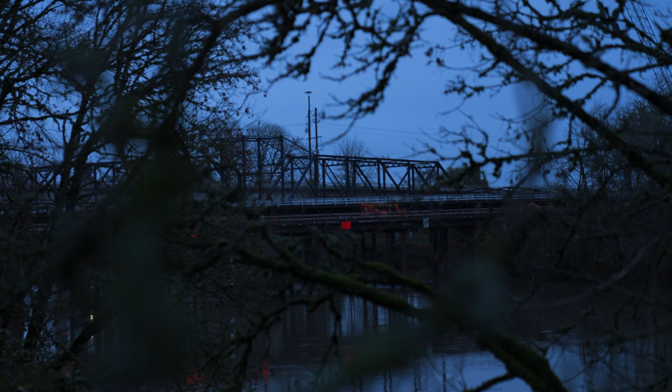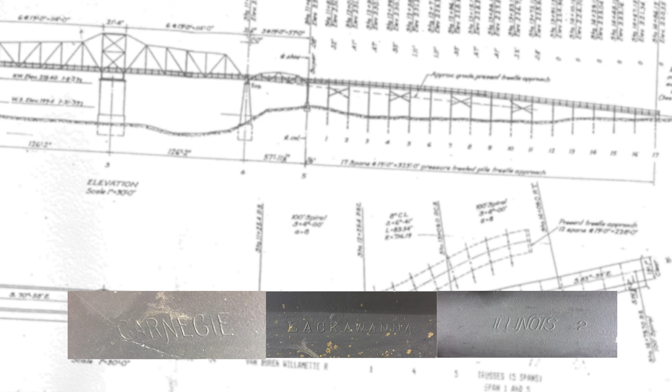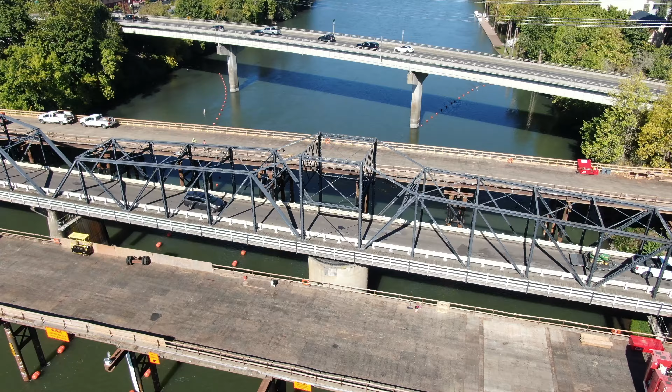Trusses were used in bridges in the past because it was the technology available at the time. They could go to a steel fabricator and get those pieces made, and then transport them to the site and build them. It was a real practical way to get a longer span, having individual pieces short enough to transport, and with the equipment of the time, you could actually build the bridge. Trusses are a very lightweight structure.

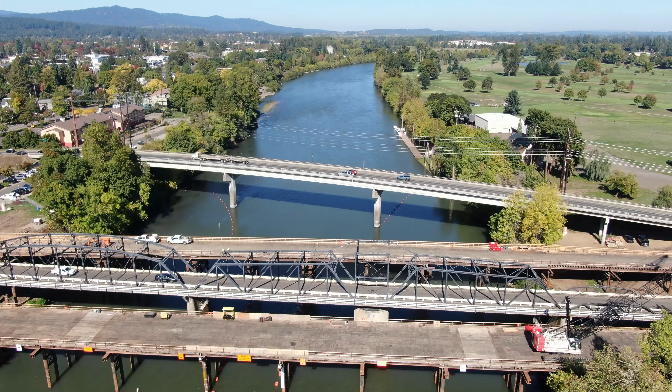That made them favorable for shipping. A lot of them were built in the steel mills, near the steel mills in Pennsylvania. This particular one, I believe, was built in Portland, but the steel probably wasn't made in Portland, and they still had shipping costs to get it down here.

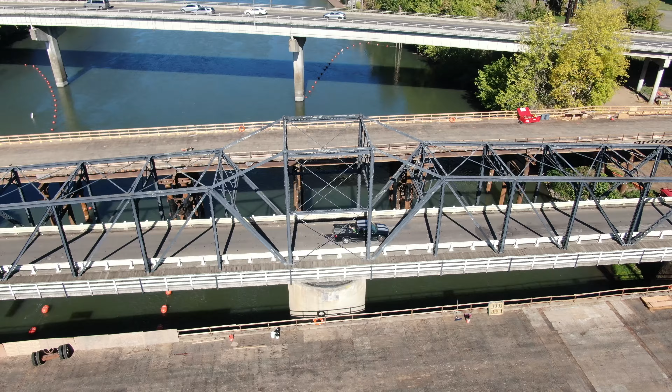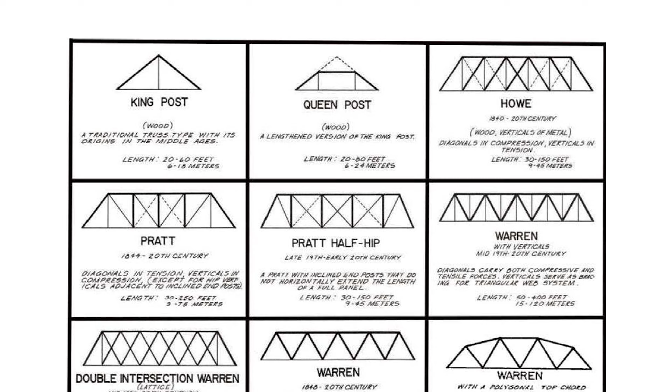The members are all lightweight and they can be assembled with light construction. If you think about it, any person can put a truss together by just putting triangles together, and then the next triangle, and the next triangle, and just build yourself out. That's oversimplistic, because one end of that triangle system has to be supported at all times.

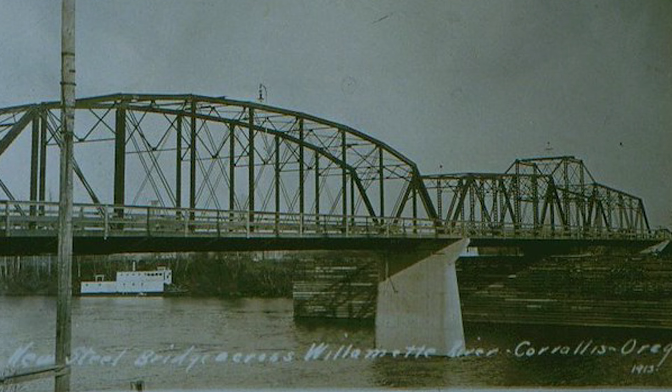So these bridges that we did in Minneapolis, as we talked to the old folks, this was in '68, there were still some who remembered it being built in the 19th century. They said those trusses were built off the ice, so they actually just shored them up off the ice as they built the truss across the river. Normally now you might build a small trestle to support the construction of the truss. But trusses are easy to build.

We've actually taken them apart and reassembled them, and you can see why they did it once you've done that. Lightweight, easy to put together, doesn't take complicated ironwork, and the pin-connected truss was very easy to handle.

Typical truss analysis methods have changed over the years. When the Van Buren Bridge was built, it was all done by hand. When we analyze the Van Buren Bridge, we use computer software. We'll do a 2D analysis of the truss, model some elements for the truck to drive on, put those loads into the truss, but primarily now it's going to be a computer model.

The Van Buren Bridge was built in 1913, so it would have been people just grinding through calculations of allowable stress in each piece of steel and choosing the most restrictive load combination that piece is going to see. It would have been extensive, painstaking calculations, and those calculations would have been checked and rechecked.

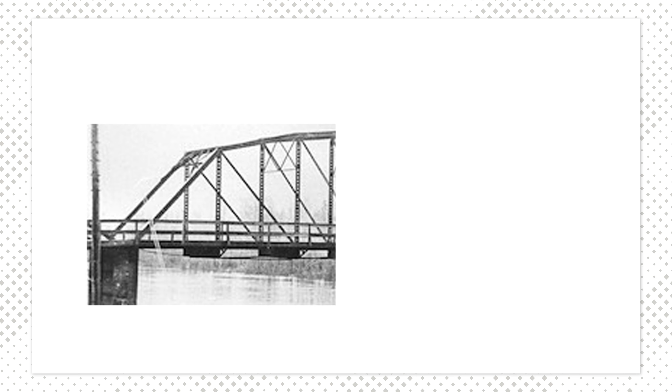I prefer analyzing using what we'd call the method of joints, which is taking it joint by joint, starting out with the bridge reaction and working it ahead joint by joint, moving those loads down to the next joint. It's a very easy, intuitive way to look at a truss. You have to be careful that you've applied your loads correctly, or that you're keeping track of putting loads on as you move to the next joint.

And it's labor intensive. The method of joints is a thorough method that provides the internal force, either tension or compression, of every member in the truss.

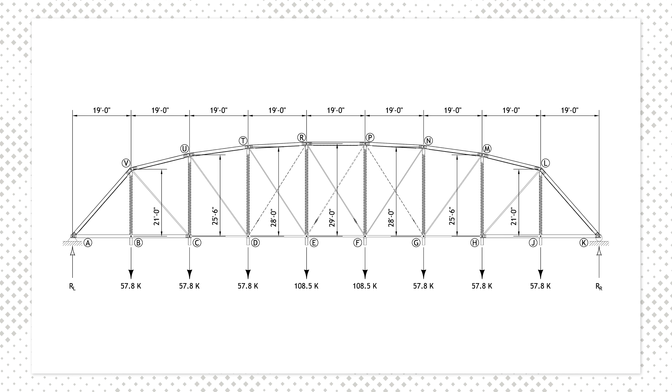We begin by labeling each joint and give the member the name of the two adjacent joints. This method isolates each node or joint and applies two equations of equilibrium: sum of forces vertically and horizontally. Because pins don't transmit moment and a point has no moment arm, we cannot sum moments.

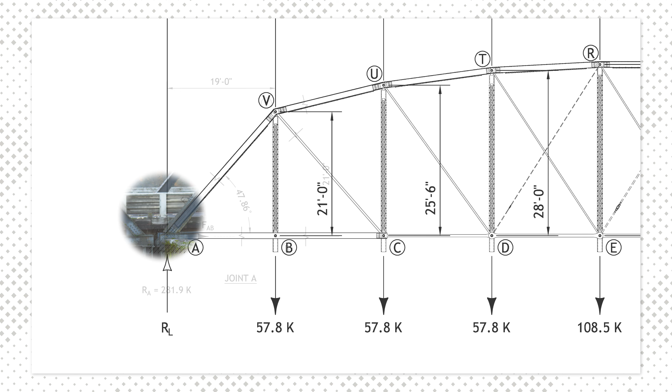We can now begin our analysis by choosing the first joint to analyze. This requires finding a joint with only 2 unknown forces. Often the support joint meets this criteria. Let's start with joint A. This point has 1 known force, which is the upward reaction, and 2 unknown forces from members AB and AV.

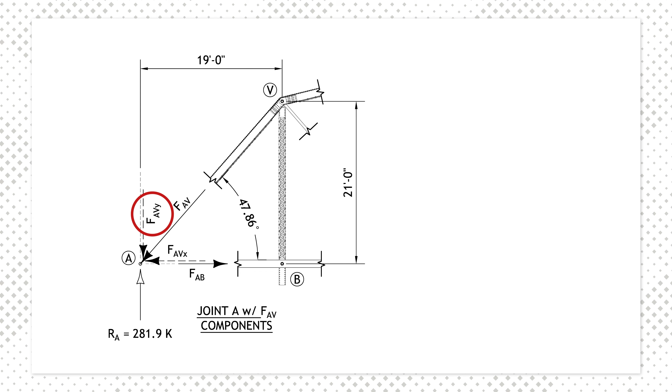Because the only 2 forces acting in the y direction are the reaction force and the vertical component of force AV, let's sum forces in the vertical direction to find force AV. We can now sum forces in the x direction to find the force in member AB. We can repeat this process, moving from node to node along the truss, to find all the internal forces.

Method of sections is less labor intensive. You cut a section through the truss, and generally I use the method of sections when I'm trying to repair a member or understand a member and not have to move through the method of joints. I can cut the section and work just in that section.

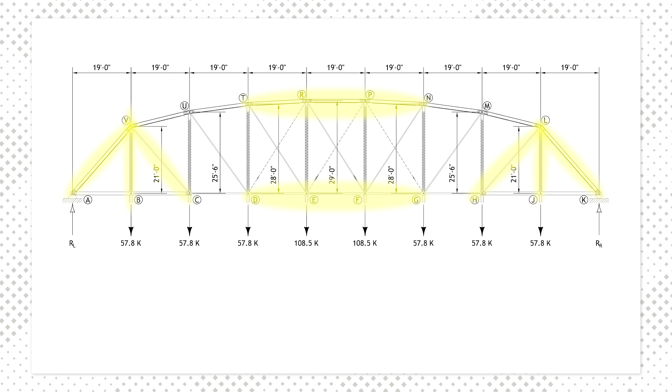The method of sections allows us to focus on portions of the truss that are of most interest, often the middle chords where moment is a maximum, and end webs and posts where shear is highest. To do this, let's create a free body diagram of the truss that passes through the middle. We cut only 3 members as we have 3 unique equations of equilibrium and can use the left or right side of the diagram. At each member we cut, we replace it with an axial force along the member length.

We guess the direction of the force, remembering if we draw it in the wrong direction, we will simply get a negative number for the force. We will use sum of moments about 2 points, as well as the sum of forces vertically and horizontally, to solve for the internal forces of the cut members. We choose the points of rotation where 2 internal member forces intersect. Note one of these points of rotation often is off the free body diagram. Not only is this okay, it simplifies the solution.

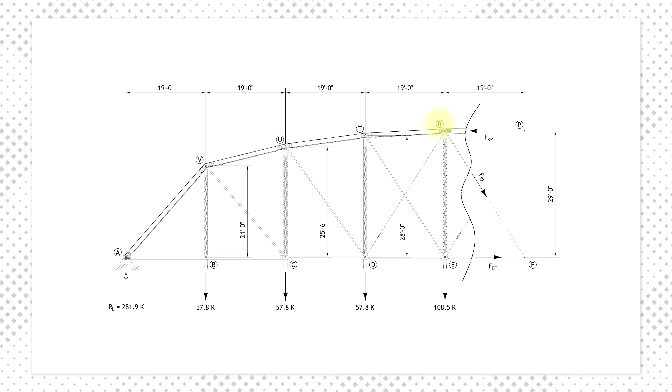Let's begin by summing moments about point F. We get the following expression and find F sub RP equal to 511.6 kips. Summing moments about point R, we get and find F sub EF also equal to 511.6 kips.

We can now sum forces vertically and horizontally to get F sub RF and use whichever direction we didn't use to check our work. Summing forces vertically, we see F sub RF is 0. Zero force members exist theoretically, but in practicality don't, due to unbalanced loading and secondary forces.

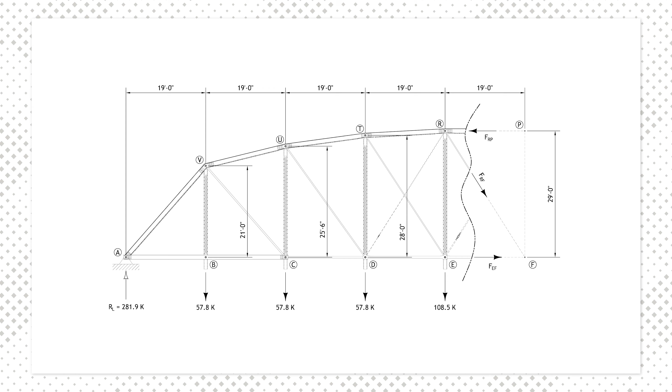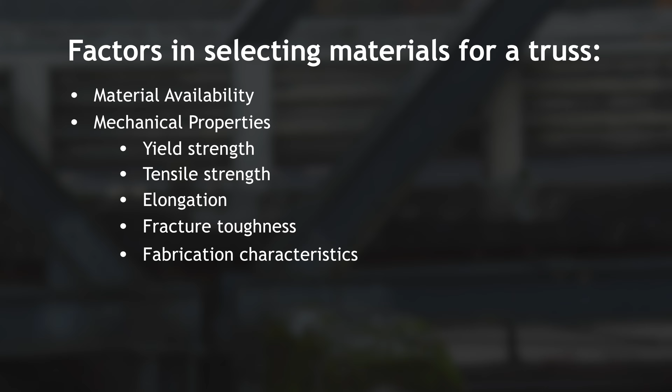Next, let's look at checking member strengths, utilizing the AASHTO LRFD bridge design specifications. We can do this now that we know the internal tension and compression forces in the truss. We first select the material we want to use for the structure. This will be a function of what material is available, its mechanical properties such as yield strength, tensile strength, elongation, and fracture toughness, its fabrication characteristics, and its resistance to environmental effects such as corrosion.

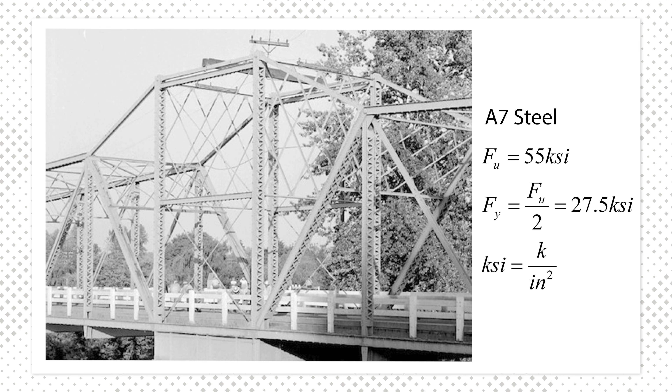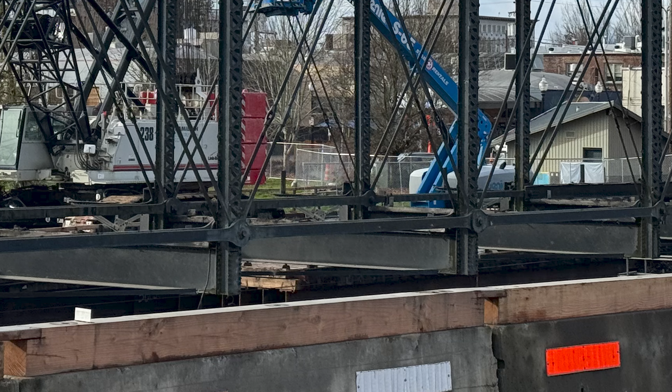At the time this bridge was built, A7 was the most common steel used for bridges. It has an ultimate strength of 55 kips per inch squared and specified yield strength of half that. Because to size a member in tension, you're going to look at the cross-section area, look at the load on it, and there's going to be a certain load per square inch of steel that steel can take, and steels come in different grades.

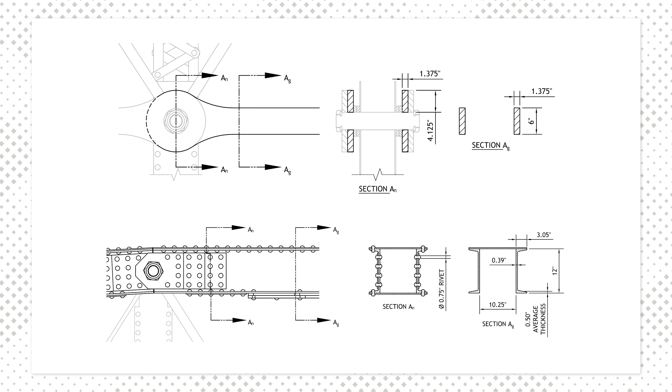Let's consider 2 failure modes for a tension member: yield on gross cross-sectional area and rupture on net area. For the eyebar, the gross section is away from the pin, and net section through the pin. For a built-up section, the gross section occurs away from any rivet holes, and the net section through the rivet line. Once we know the material and gross and net areas, we can apply concepts we learned in mechanics of materials to find the tensile strength of the member we are considering.

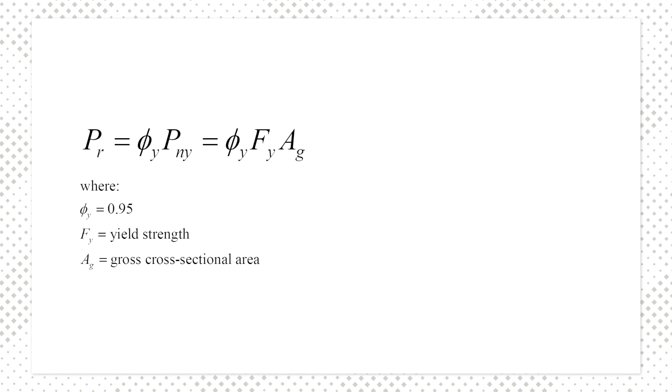The first equation finds the yield strength of the member by multiplying a resistance factor by the yield strength and gross cross-sectional area.

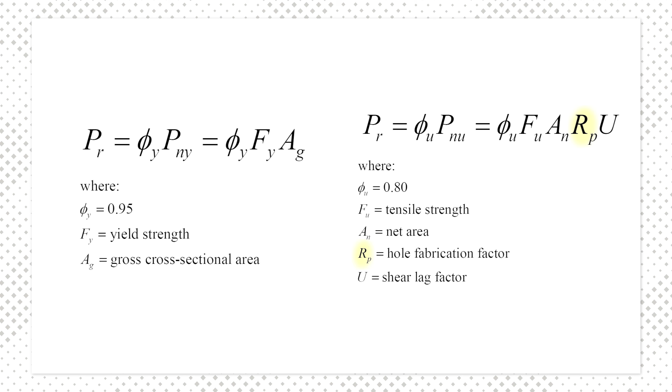The second equation finds the rupture strength by multiplying a resistance factor by the tensile strength, net area, hole fabrication method factor, and shear lag factor. We take the lower of the two values as the member strength.

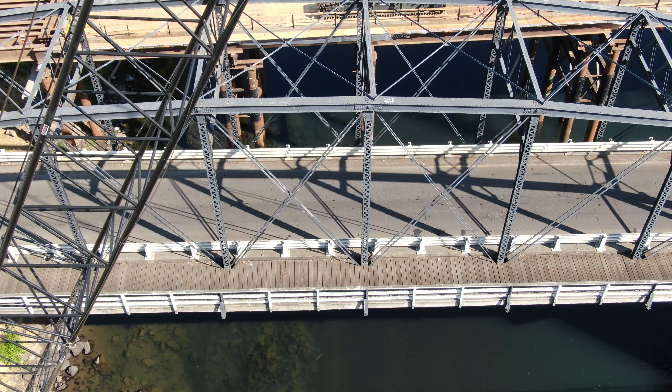If this strength is greater than the internal force, we can say the member is satisfactory. If not, we would retrofit the member in existing construction or choose a larger one for new. Note, this analysis doesn't consider fatigue, which we will cover in Module 7.

A member in compression is much more complicated than just a member in tension, because it can fail by being crunched together, or it can start bending, and columns can fail in different ways. There are some long-established formulas for how slender you can make a part that's in compression. You can go to a truss bridge and pretty easily look at the members in tension and compression, because your tension member will have a much smaller cross-section than those in compression.

Buckling most often governs compression behavior, as members tend to be proportioned such that they will bow outward before the material can yield. Buckling occurs when a compressive load is applied to the end of a member. Slight imperfections in load and alignment cause the middle of the column to start to displace perpendicular to the long direction of the member. As the displacement increases, secondary forces occur which cause more displacement, leading to higher secondary forces, eventually causing the member to buckle and potentially collapse.

The geometry of a structural member drives how it will behave under load. Bending members are most efficient when they are deep compared to their width. However, compression members are most effective when they are more square. This is because the member will buckle about the axis with the smallest radius of gyration. Also, remember that as material is moved away from its neutral axis, the section becomes stiffer, stronger, and less prone to buckling.

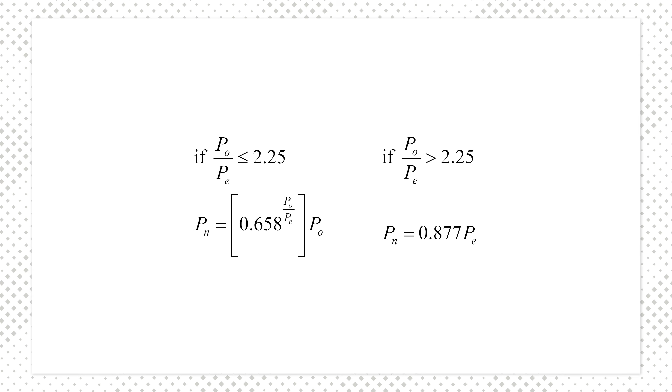We then multiply P sub N by the resistance factor, phi, and compare this against the internal compression force in the member. If this value is greater, the member has sufficient design strength.

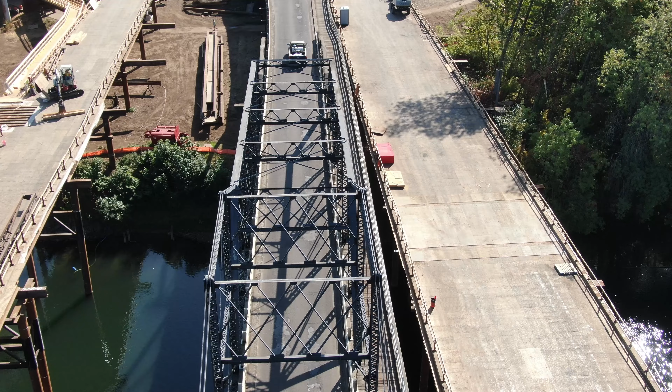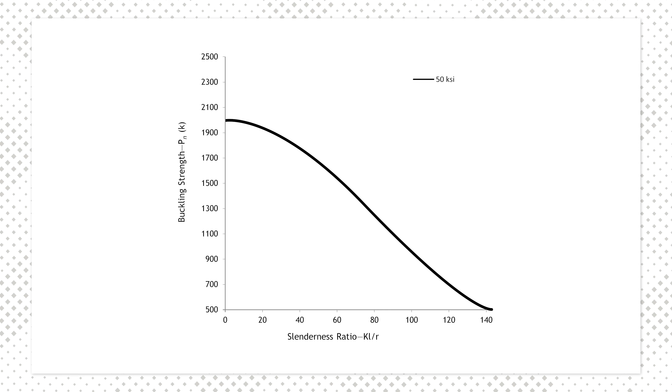Looking at these equations in figure form may help us to better understand what is going on. If we plot buckling strength on the vertical axis and slenderness ratio on the horizontal, we see how strength drops as slenderness increases. In other words, if a member gets longer or smaller in cross-section, buckling strength decreases. We also see the Euler equation over-predicts strength for smaller slenderness values.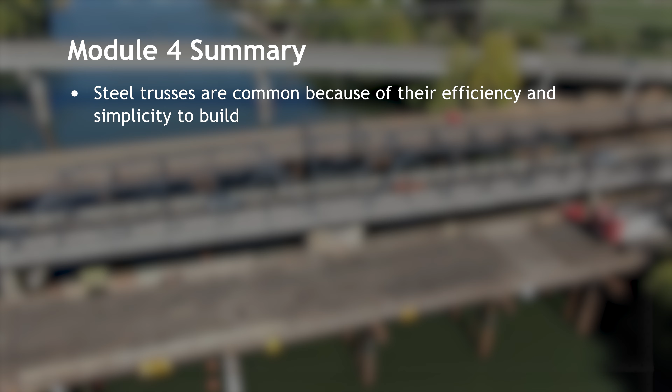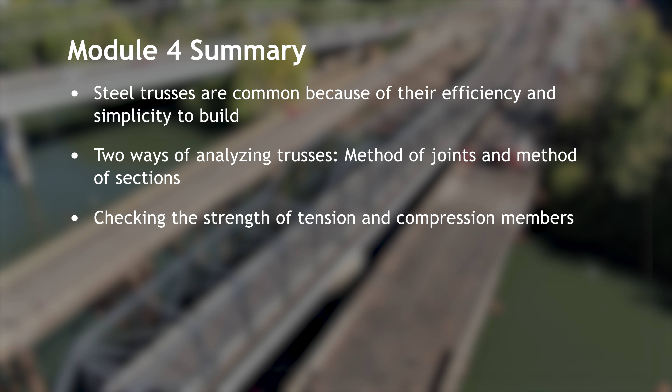In this video, we have begun to understand why structural steel trusses are so common. They are highly efficient and relatively simple to build. We have also explored two ways we can analyze trusses by hand, method of joints and method of sections. Engineers now use these to check computer models or for quick hand calculations. Finally, we have learned how to check the strength of tension and compression members. With a full understanding of these principles, you have the basic tools to design a truss.